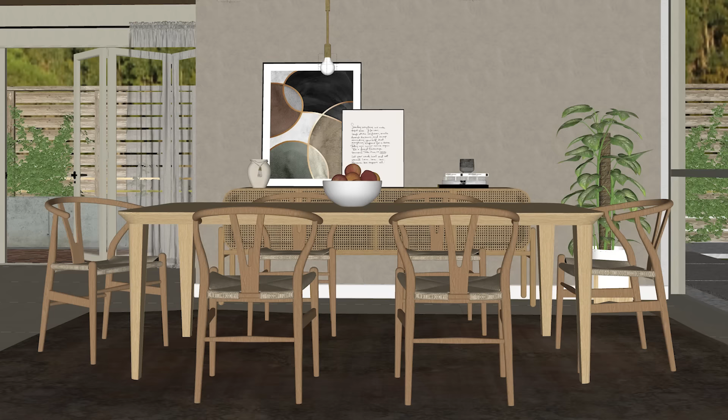Okay, back to our list. Starting with number 1, orient your model. Vray is responsible for shining light into your model. And out of the box, it will render realistic sunlight into your SketchUp scene. But if you open Vray and find that the sunlight isn't shining in the direction you want, you've made a costly mistake. There are 2 things that you should have already done in SketchUp first, and failing to do them before you get to Vray causes problems later.

Now, I should note, if you're using Vray 5, there is a new feature that allows you to adjust the position of the sun after the fact in Vray. But even for Vray 5 users, I recommend following these steps, and I'll talk about why in a second. So what do I mean by orient your model? That means aligning your model correctly in the north-south direction, so the angle of the sun and shadows in SketchUp is accurate, because Vray will automatically look to SketchUp to tell it where the sun is.

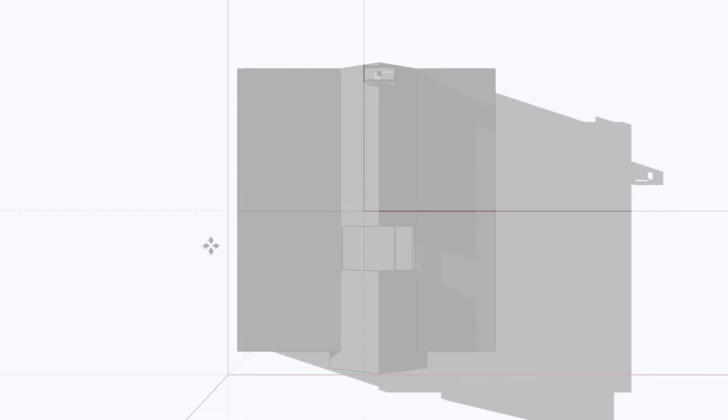To do that, all you need to know is that by default, the green axis in SketchUp is pointing north, plus or minus a few degrees depending on the location of your project, which means that the sun is positioned along the red axis, plus or minus a few degrees depending on the date. So the first thing you should do early in the process of building your SketchUp model is correctly orient your model based off the axes.

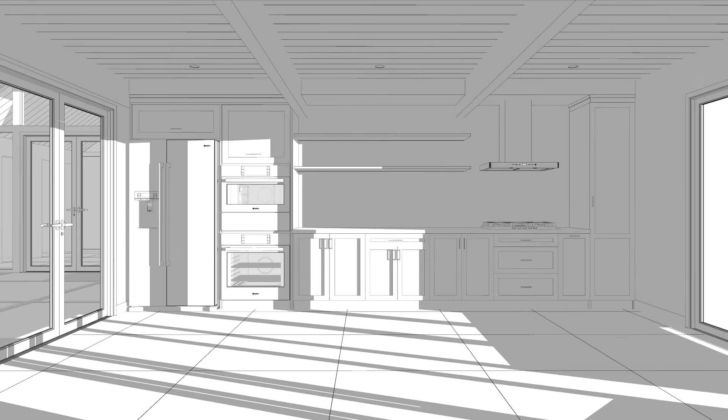And the second thing you need to do is tell SketchUp where the sun is along the east, west, or red axis. To do this, turn on your shadows and use the date and time sliders to get an idea of how the light will shine across your scene. Even though you can edit the sun's angle in Vray 5, I still always recommend orienting your model correctly in SketchUp first, because it's a helpful reference to have while you're building out your model, seeing how the sun and shade will move across your design at different times of the year and throughout the day.

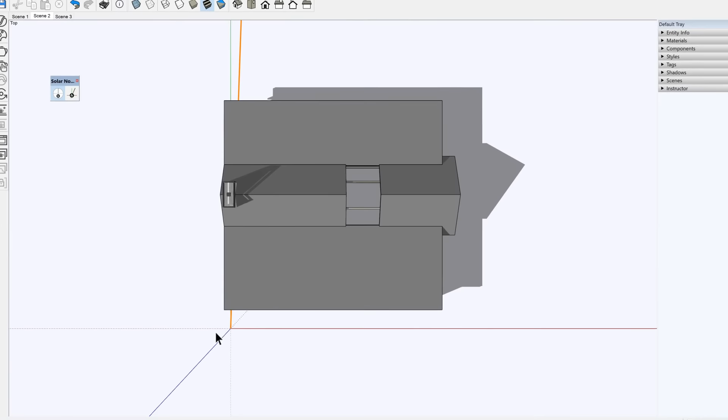Now, if you need to be even more accurate in terms of the angle of the sun, you can use the Add Location feature to geolocate your model to an exact place in the world. And you can use the Solar North extension to show you true north before orienting your SketchUp model. All right, your model is oriented and you've got a nice angle for the sunshine and shadows set up for your rendering. The next item on our Render Ready checklist is number 2, organize your file.

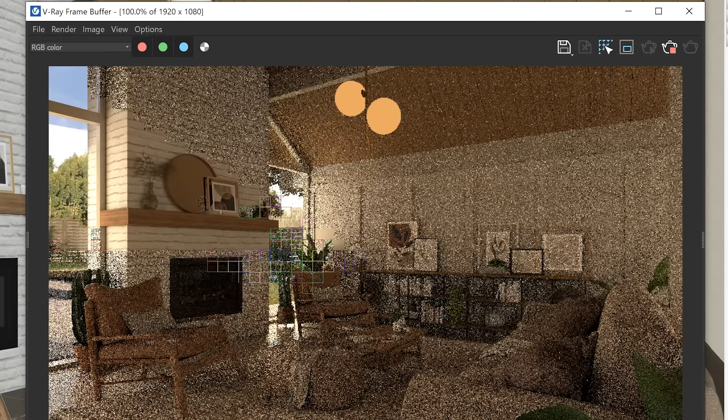When you create a final rendering in Vray, you click a button to render and then wait anywhere from a couple of minutes to several hours to see the final result. There are settings in Vray to help you minimize the time each render takes. But when it comes to excessively long render times, the root of the problem starts with an unorganized SketchUp model. For faster render times and faster changes between renders, here are a few tips for organizing your model before you get to Vray.

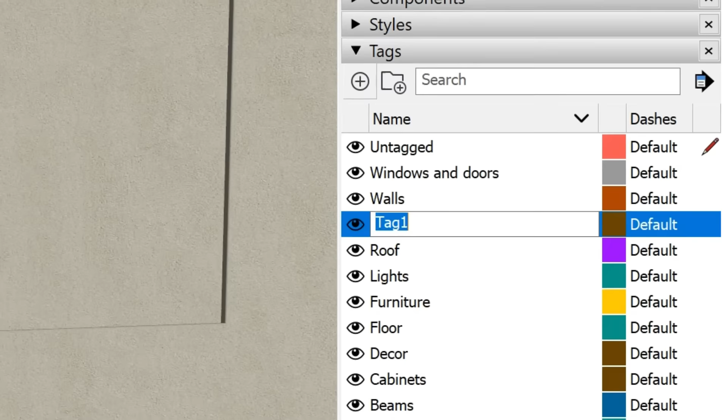As I mentioned earlier, you should be familiar with everything we covered in our Getting Started with SketchUp video, so you already know to make everything a group or component as you build your model. In order to make your model render ready, you'll want to assign those groups and components to tags based on what you'll want to hide or show in your final rendering.

For example, hiding off-camera elements that won't show up in the final image is an easy way to speed up your rendering times. But another tip that can really help speed things up as you're working on your rendering is having tags set up so you can hide some on-camera details early in the rendering process to speed up your test renders. Then, when you're dialing in the final look, you can turn those elements back on. This can help save a ton of time as you iterate through changes in Vray.

Lastly, you can also use tags to hide and show different design options to help you preview how each will look in the context of your realistic rendering. All right, once your file is organized, you're ready to move on to number 3, master your materials.

Often, as you model in SketchUp, you'll be adding colors and materials along the way. Then you might be excited to jump into V-Ray to make those materials more realistic looking. But working with your materials in V-Ray can be really time consuming if you don't plan ahead in SketchUp. Here's why. All the materials you add and test out along the way in SketchUp end up creating a long and often confusing list to work with later in V-Ray.

Some materials on this list aren't actually being used in the model, and many have names that aren't very helpful. You can end up wasting a lot of time trying to find and change the materials you need to edit. So if you invest some time into creating a few good habits in SketchUp up front, your future self will definitely thank you.

Great, Scott! I came back to warn you. You gotta fix your materials. I just told them. Thank you.

Here are a few things to keep in mind when working with materials. First and foremost, name every color or material that you add to your model. It's much easier to edit all of your materials later in V-Ray when you're scrolling through a list of specific names rather than generic ones. Also, naming your materials disciplines you to use the right materials on the right surfaces.

For example, if you have white walls and white cabinets, and you paint both with the same generic white in SketchUp, you'll have trouble later if you want the cabinets to be glossy and the walls to be flat, since you won't be able to edit them as separate materials in V-Ray. Instead, you should create 2 different whites and name them something like white wall paint and white cabinet finish, enabling you to differentiate them later in V-Ray.

That said, there are also times where you'll want to use a single material in SketchUp. Perhaps you have a few different metal surfaces in your model, and while they're made of different materials in the real world, maybe they all look similar enough that you could just use the same chrome material on all of them. That's a huge win when you get to V-Ray, since you'll only have to edit the single chrome material to make everything shiny.

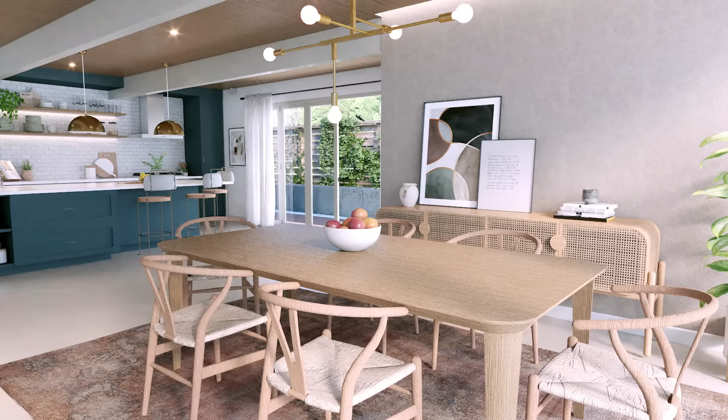Beyond staying organized, I've also got 3 bonus material tips for you. First, if you import your own image and use it as a material, pay attention to the resolution of the image. Low resolution materials may look blurry in your final rendering, and high resolution materials can really slow down your render times. Ideally, use an image with a resolution that's close to what its resolution will be in the final rendering.

Second, when you don't have the right material in SketchUp, use a color as your proxy. Later in V-Ray, you can easily swap that color for a render-ready material out of V-Ray's library. And third, if you paint a material on the wrong side of a SketchUp face, it may not render correctly. In your Styles panel, under Faces, set them to display monochrome. That way you can see if any blue faces are facing out.

For any that are, right-click on them and pick the option for Reverse Face. Then switch back to Shaded with Textures mode and make sure your material is added to the white face that is now properly facing out. All right, now that you've mastered your materials, the next item on our Render Ready checklist is number 4, add important details.

In real life, the world is full of beveled edges, reliefs, and other design details. To get a realistic rendering out of V-Ray, your SketchUp model needs to have the same attention to detail. Here are 3 specific things to look out for.

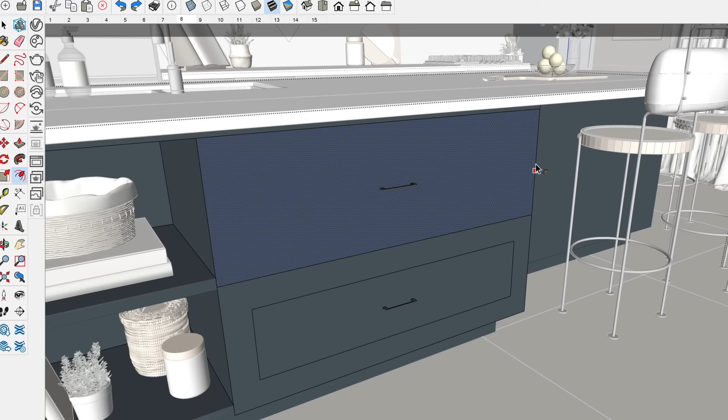First, V-Ray renders faces, not edges. So if you take this cabinet, for example, you can't just use edges for the door front style. You need to get in there with the move or push-pull tools to add some depth. Second, even when things touch in the real world, there are often small little gaps. Adding these across your scene can have a big impact on your rendering later.

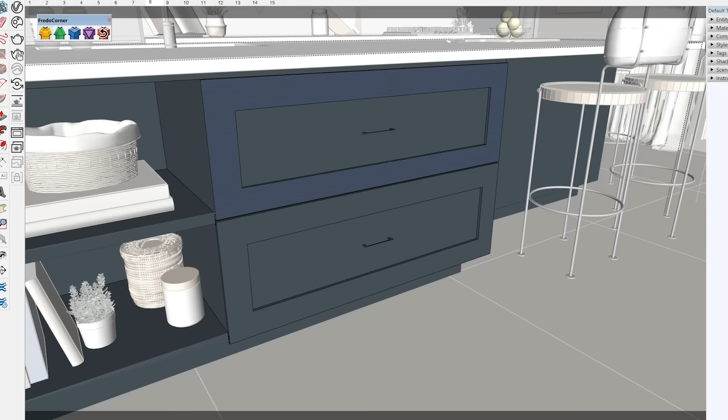And third, SketchUp creates hard edges and corners, but in the real world, things tend to be beveled or rounded. Use the Follow Me tool or the FredoCorner extension to add these subtle but realistic details. Now, speaking of adding details, that leads us to the next item on the checklist.

Number 5, mind your polygons. Perhaps the most important thing you can do in SketchUp, the one that will have the biggest impact on the quality and speed of your renderings in V-Ray later, is to mind your polygons. So what does that mean? That means optimizing the level of detail in your model by being mindful of the number of polygons you're working with. To do that, let's quickly review some fundamental concepts.

First, as we saw with the sphere, make sure you manage your polygon count based on how visible the objects will be in the final render. For example, round corners for objects that are closer to the camera, and maybe skip the ones that are further away. And for any object that you will use more than once, make it a component before copying it around your model. Each copy will still increase your polygon count, but V-Ray can render component instances, or copies of that component, much faster than groups or non-group geometry.

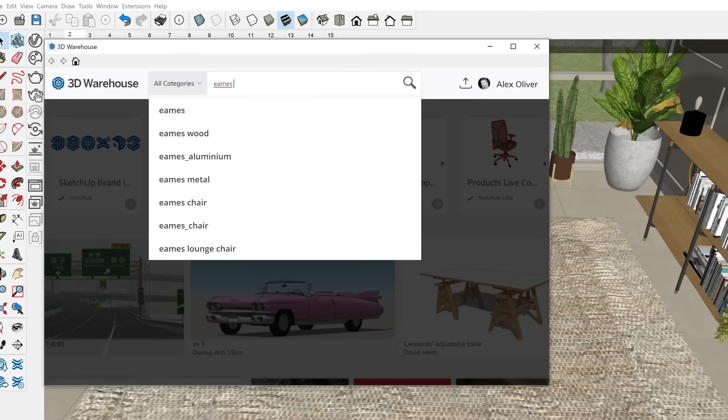And for components you get from sites like the 3D Warehouse, be sure to comparison shop. When you're searching for a particular thing, for all the best looking options, start by trying the one with fewer polygons relative to the others.

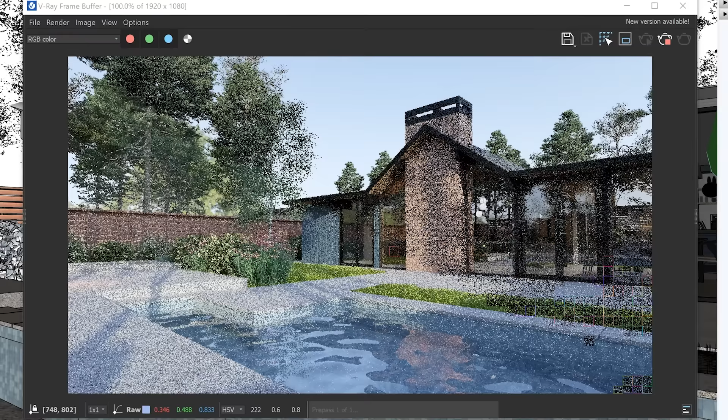Now, when you've followed all the rules for managing your level of detail, but you find you still need to include higher polygon objects to get the quality you want, just know that there's a feature in Vray called proxies that can help. That's when you turn high polygon SketchUp components into lower polygon versions, or proxies, that keep your SketchUp model light while shortening your rendering times, all while allowing Vray to still render the higher polygon version into the final image. So you can have your cake and eat it too.

Okay, we've made it through the main points in our checklist. But as I mentioned earlier, I've got a bonus tip for you. Since we published the previous version of this video, we've come up with one more way to help you take your Vray renderings to the next level by being mindful of one more thing in SketchUp before you get to Vray. Use high quality models. If you've done everything we've outlined so far, then your model will be set up for success when you get to rendering in Vray.

However, one thing that can hamper the realism of your final rendering is making the mistake of using lower quality 3D models for the objects you need to add to your scene. By low quality, I mean objects that haven't been modeled with a realistic attention to detail, or objects that have low resolution, unrealistic, or inaccurately applied materials.

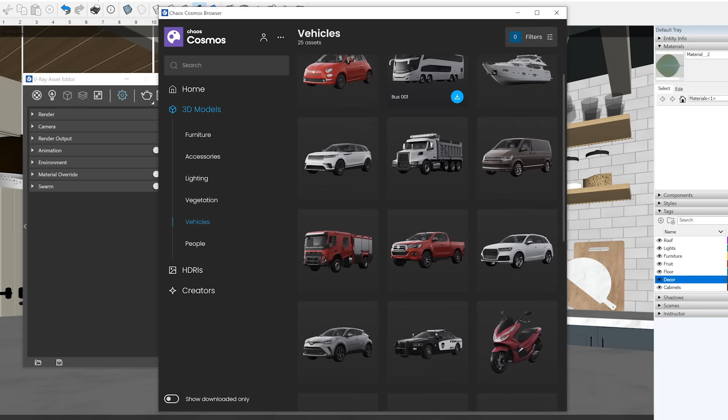So how do you avoid that? First, if you're using the latest version of Vray 5, then you'll have access to Cosmos, a curated 3D library of high-quality, render-ready models of things like furniture, trees, cars, people, and more. To use them, just click on the Cosmos icon on your Vray toolbar.

Browse to find the object you want, click to download, then click again to import. It will be attached to your Move Tool cursor. Click to set it down, then hit the Escape key when you don't want to place any more instances of the model. By default, the object will display without much detail, keeping your polygon count low, and the materials won't show up.

But when you render, you'll see the full level of detail with realistic materials. Now, if you're using an older version of Vray or looking for something that you can't find in the Cosmos library, another option is to look in SketchUp's 3D Warehouse.

But if you're searching through the millions of models available to you on there, know that many of them are low quality, and trying to find good ones can be overwhelming. But I've got a few tricks that can help you filter down to the good stuff.

One thing you can do is, when you find a model that looks like it's pretty good, click through to the Model Details page. From there, look to see if that model is found in any other collections. If so, click on a promising looking one to see the models in there. Now you're looking at a curated version of the 3D Warehouse.

Other designers like you have taken the time to find gems so you don't have to. To find more curated collections from other SketchUp users, you can do the same thing again, clicking through to a Model's Details page and clicking through to another new collection.

And along the way, be sure to save models or collections to your own collections so that you can find them later. And if you find some really good looking stuff, click on the author's name to see everything else they've created and their saved collections.

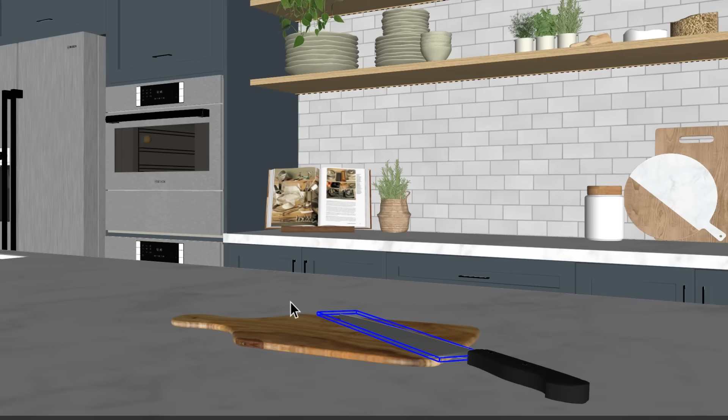Just know that when you use a model from the 3D warehouse, its materials will rarely be set up to render realistically in V-Ray. So you'll have to spend a little time configuring those settings.

Next, you should know that the 3D warehouse isn't the only place to find high-quality SketchUp files. There are dozens of other websites that offer 3D models you can use in SketchUp. Too many to list here, but I'll add links to some of my favorites in the notes. And lastly, know that you're not limited to using only SketchUp files.

That's right, it's possible to import other 3D file formats. While there are a number of ways to do that, which we don't have time to cover extensively right now, one easy solution that I recommend is an extension called Transmutr, which makes for quick and pretty seamless importing of other 3D file formats for using in your V-Ray for SketchUp renderings.

And once you realize you're not limited to only SketchUp files, that greatly expands your options for finding the best quality models to add to your scene. Don't worry, I've added links to some of these other popular 3D model websites in the notes as well.

Now there's just one thing to remember that goes along with this bonus tip, and it goes back to one of our previous tips. Don't forget to mind your polygons. Because if you're not careful, all these high quality models could slow things down in your model and your renderings. So be sure to pay attention to polygon counts in the 3D warehouse, opting for models with lower polygon counts if you're choosing between two nice looking options.

Or take advantage of extensions like Transmutr or Skimp, which can be used to reduce the complexity of the model without losing visible quality. And that's it! You made it through all the steps to make sure your model is render ready.